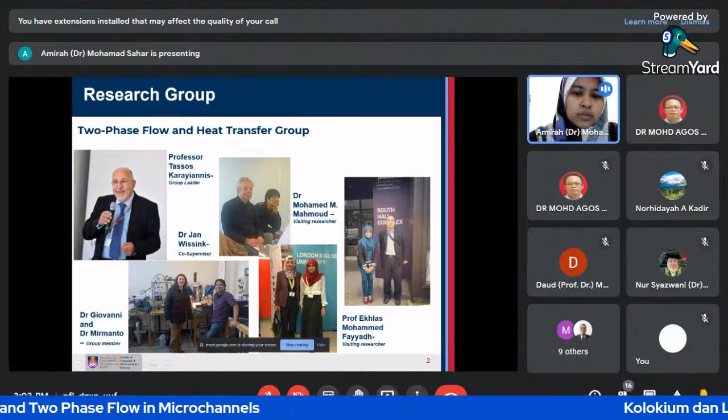Also working with two visiting researchers, which is Dr. Mahmoud from Zagazig University, Egypt, and Professor Ekhlas Mohammed at the University of Technology, Baghdad, Iraq. And also this is a group member and also the PhD student under this research group, which is Dr. Giovanni and also Dr. Mirmanto.

So Dr. Mirmanto is the one doing the experimental study, but in this group I am the only one to do the numerical work, which is the simulation work.

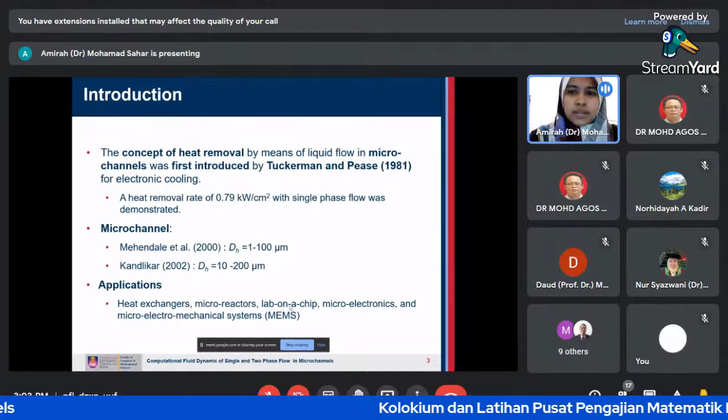Okay, so here is some research background about my study. The concept of heat removal by liquid flow in microchannels was introduced by these two guys, Tuckerman and Pease, in the early 80s for electronic cooling, which demonstrated heat removal rates of 0.79 kilowatt per centimeter squared by using single phase flow.

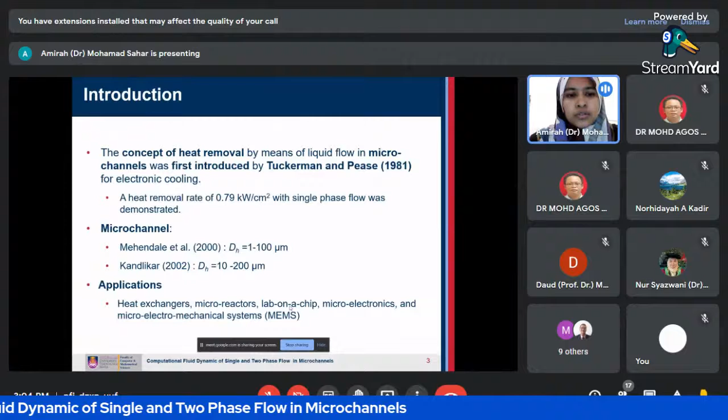Basically in microchannels, they characterize the microchannels by the diameter of the channels, which we call the hydraulic diameter. Most studies characterize based on the application, where Mehendale's range is between 1 to 100 micrometers, and Kandlikar's is between 10 to 200 micrometers.

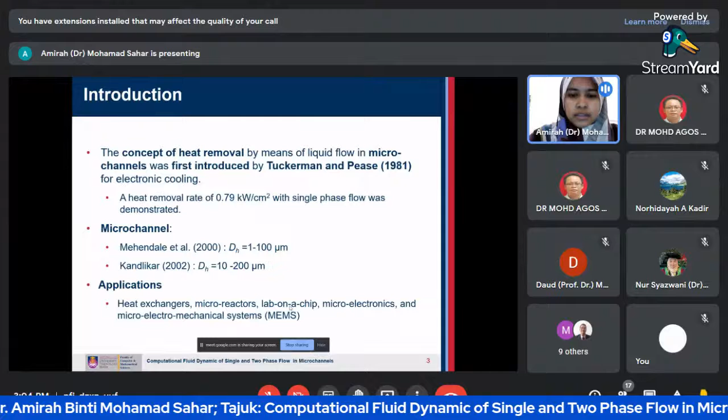So in microchannels, the application is mostly for heat exchangers and microreactors, lab on chip, microelectronics, and also microelectromechanical systems.

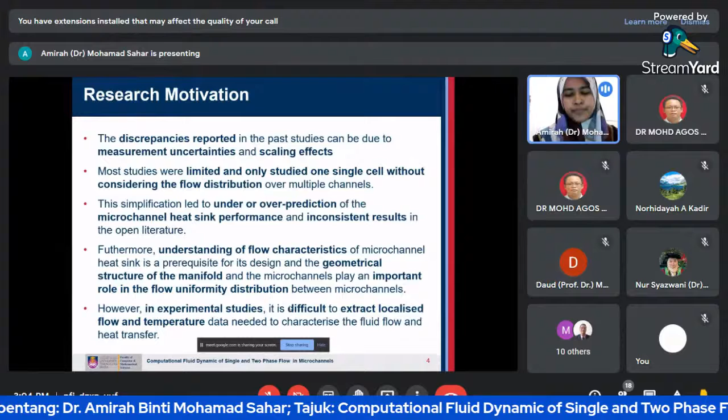The motivation of this study is that we found discrepancies reported in previous studies. Basically it's due to measurement uncertainties and also scaling effects, because most studies nowadays are still using conventional theory, which is macro-scale theory, applied to the microchannel system.

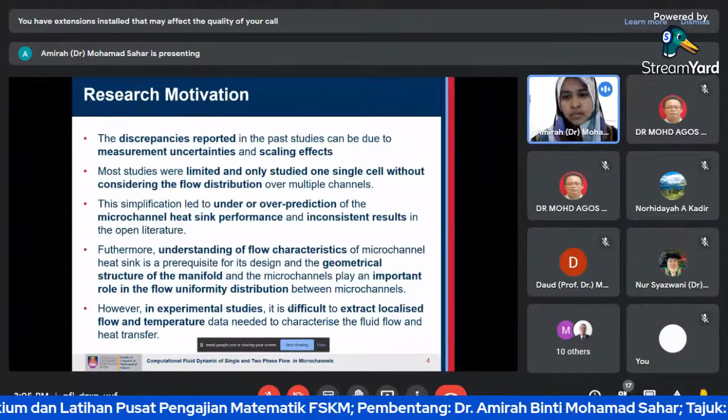And in a multi-channel configuration, there are limitations where studies only focus on single cells without considering the flow distribution. So we found this leads to under- or over-predictions of the microchannel heat sink performance, and also inconsistent results in the open literature.

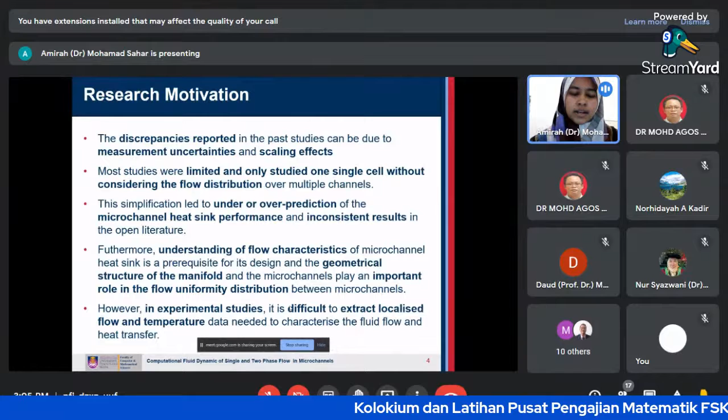So we know that understanding the flow characteristics is quite important. Basically this has significant influence on the geometrical structures of the manifolds, which plays an important role in the flow uniformity distribution. However, in experimental studies, there are limitations to extract localized flow and temperature data, which is very important to characterize the fluid flow and heat transfer.

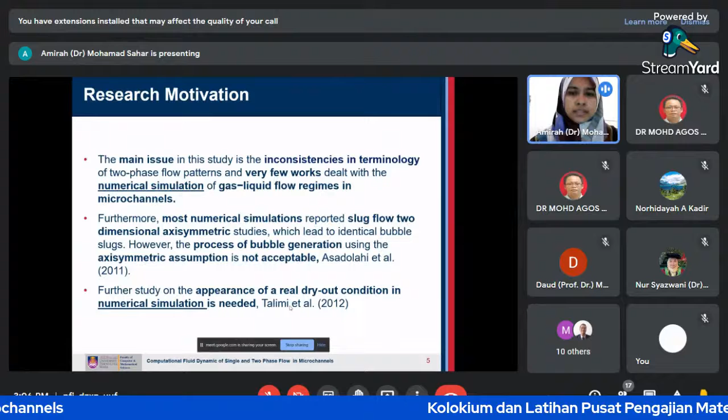For the two-phase flow issues, we found inconsistencies in the terminology of flow patterns in two-phase flow, and there are still limited works dealing numerically with the gas and liquid flow regime in microchannels.

Also, for specific flow patterns such as slug flow, most numerical studies conducted previously only use the assumption of a two-dimensional axisymmetric study, because they want to reduce computational time, but this leads to identical bubble slugs.

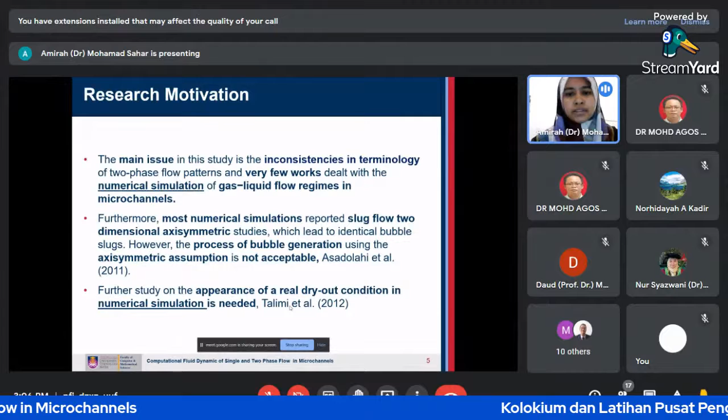Okay, so the shape of the bubble will be the same. However, we know that the process of bubble generation using the axisymmetric assumption is not acceptable. And also, the appearance of the real dry out in a microchannel system in numerical simulation is still needed.

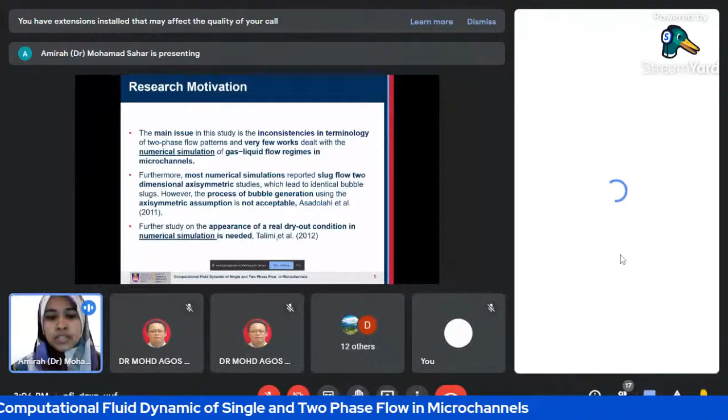So here is the objective of my PhD study, which has about six parts. I have to do single phase flow and also two-phase flow. In single phase flow, I have to simulate the single channel configuration or also the multi-channel configuration.

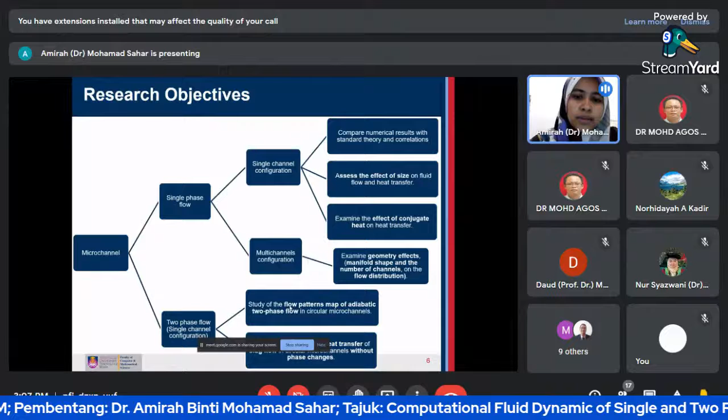In the single channel configurations, I focus on comparing the numerical results with the standard theory and correlations, and also assessing the effect of size on fluid flow and heat transfer, and examining the effect of conjugate heat transfer in a microchannel system.

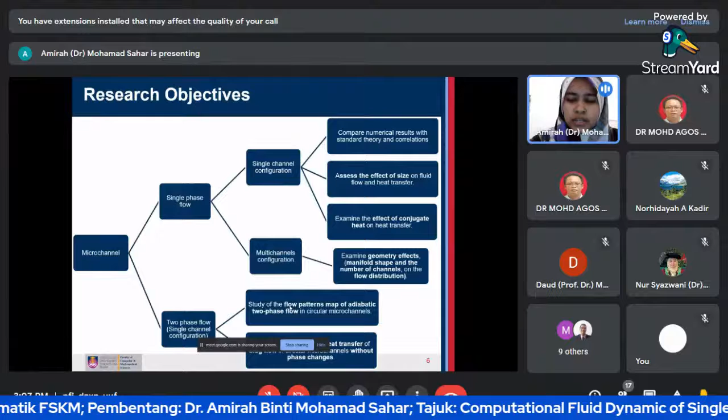However, for the multichannel configuration, we focus on studying the flow distributions, examining geometrical effects such as the manifold shapes, the number of channels, and the inlet flow arrangement.

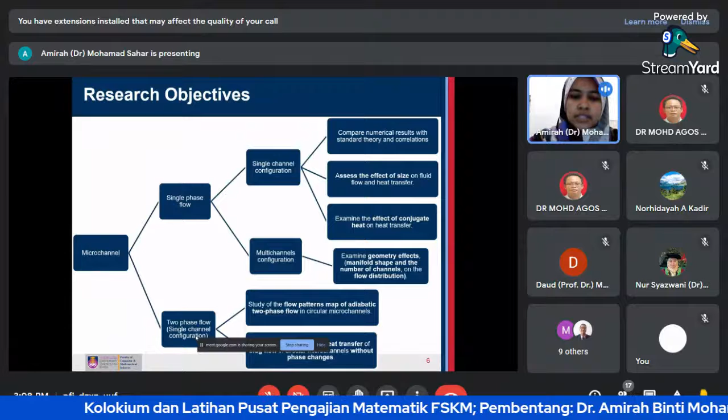In two-phase flow, which is the third project, there are two objectives: to study the flow pattern map of adiabatic two-phase flow in circular microchannels, and to study the fluid flow and heat transfer of the slug in a circular microchannel without phase change.

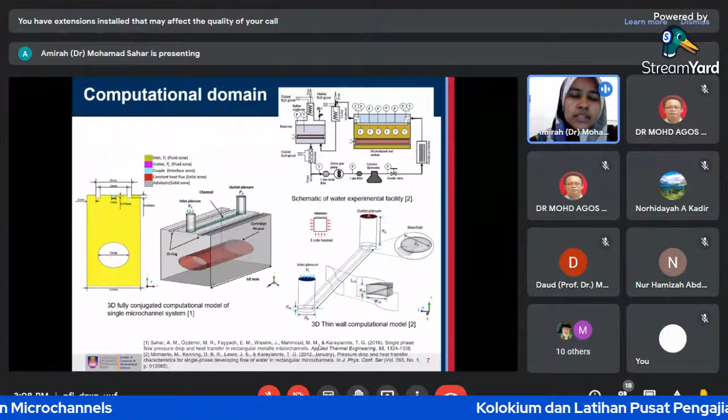I'm doing the full simulation using ANSYS Fluent to simulate all the numerical work, and I also construct the geometry and meshing using ANSYS ICEM.

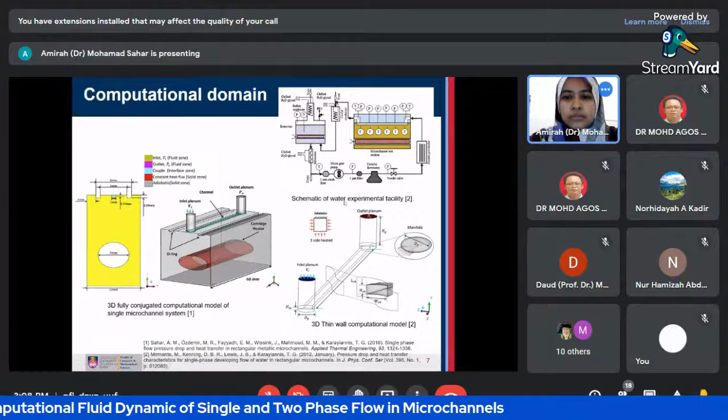Okay, so here is the computational domain. As you can see, here is a schematic of the water experimental facilities. This is the microchannel test section that I have to simulate.

In order to assess the size effect, I only use the 3D thin wall computational domain, because we want to reduce the computational time.

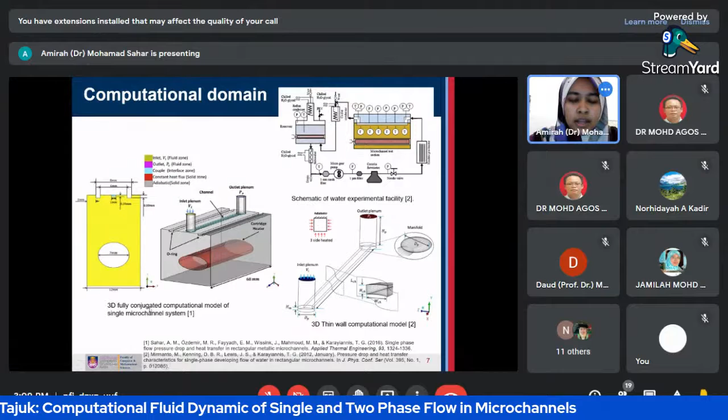However, in order to study the conjugate effect, I have to simulate the whole test section, which includes the copper block. So here are the channels on top of it, and here is the copper block, which you can also see from here.

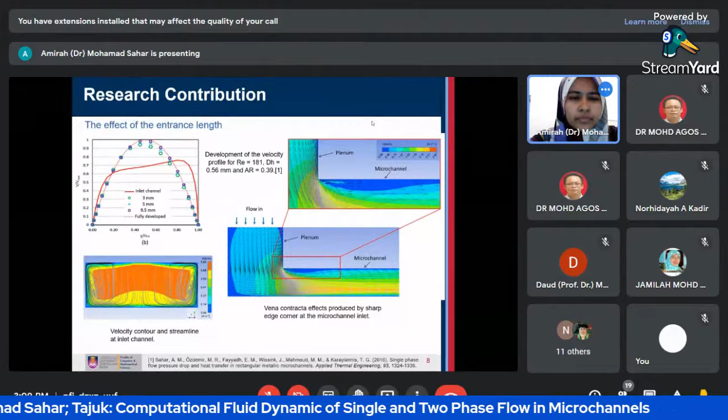Okay, so as a result, here is some of the research contribution. We managed to see the effect of the entrance length, because most experimental data reduction methods assume that the velocity profile entering at the inlet of the channel is fully developed.

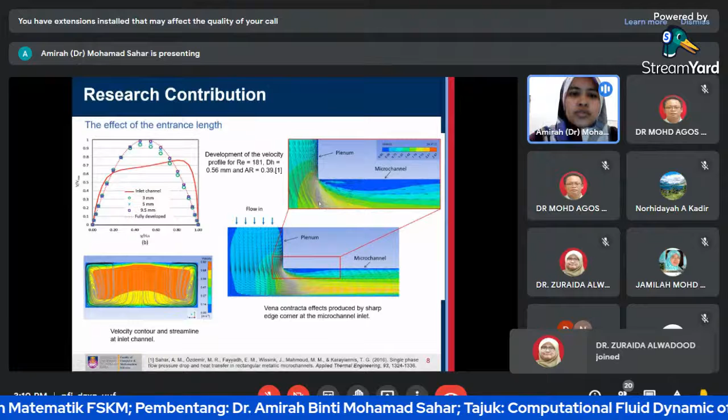They just assume that the velocity profile enters at the inlet of the channel, which is the plenum, and here is the channel. So they assume that the velocity profile is uniformly distributed, assuming it is fully developed.

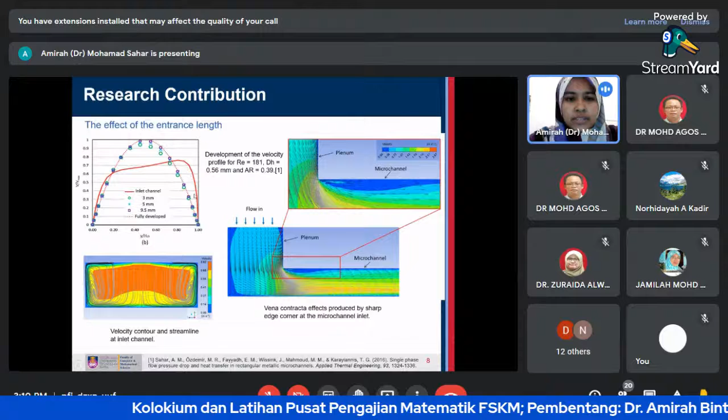However, the advantage of using CFD is that we can plot and get the velocity profile at a certain location we want. For example, we can see that the velocity profile at the inlet of the channel is not fully developed compared to other locations along the channel.

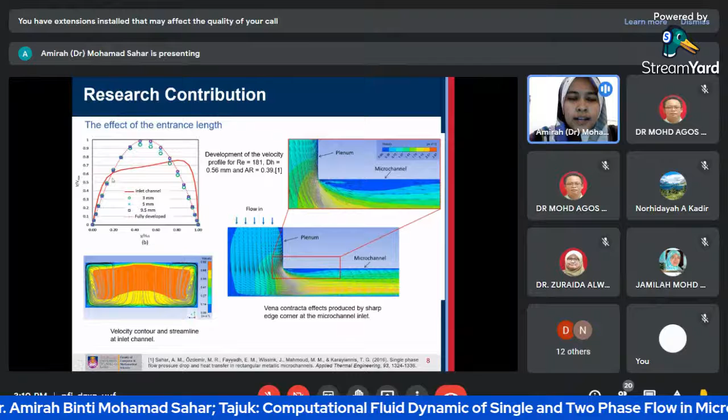This is because we can also show graphically using ANSYS CFD that this velocity profile happens due to the vena contracta phenomenon at the inlet of the channel, which is produced by the sharp edge corner exactly at the inlet of the section.

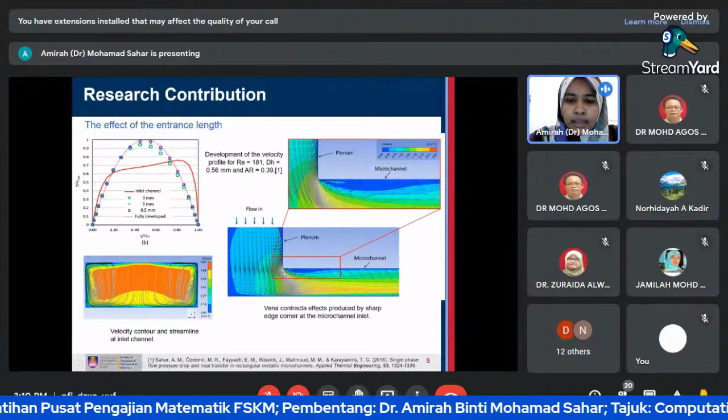All right, so here you can see the velocity contour and streamline at the inlet of this channel. This result was successfully published in Applied Thermal Engineering.

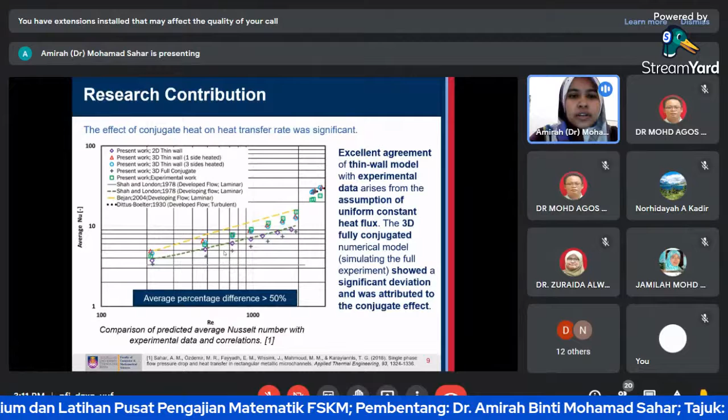So the second objective, another part of the first project, is that we also managed to show that the effect of conjugate heat transfer in a microchannel system is significant.

In my study, for this case I developed four models, including a 2D thin wall model, which I needed to conduct in order to compare with the conventional theory, because in conventional theory they just use a two-dimensional model.

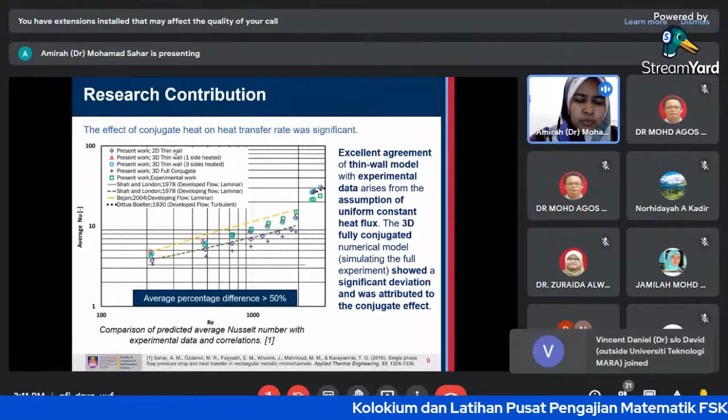And also I did a 3D thin wall model.

The assumption that you use in experimental is exactly the same that we did in the simulation, which is in terms of the boundary condition.

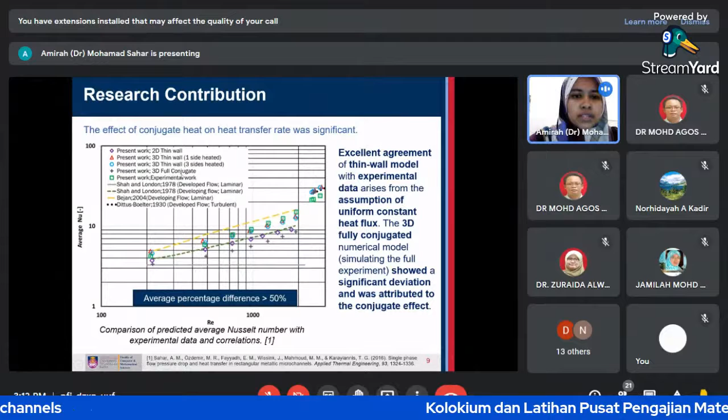So in order to study the effect of the conjugate, what I have to do is a 3D full conjugate simulation, which is you have to simulate the whole test section with a copper block.

So what we found is that for the 3-dimensional case, which is exactly the experimental setup, we are not in agreement with the experimental data provided by the group in my research.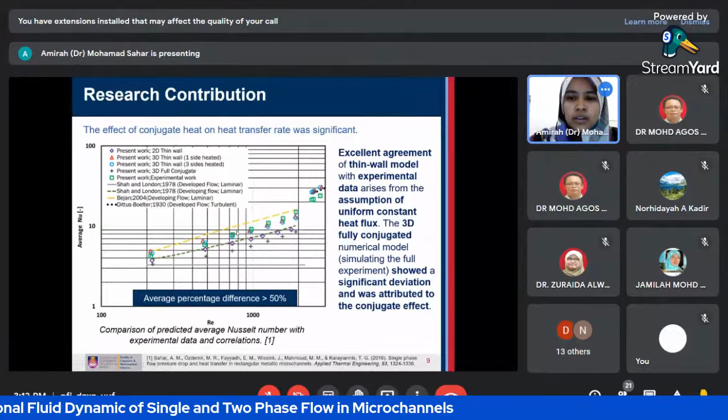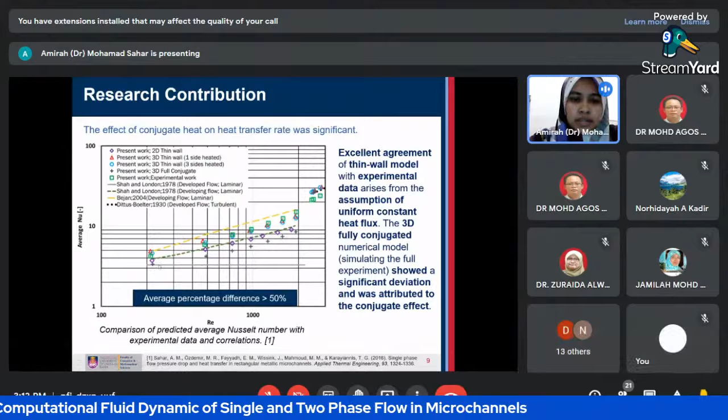Because the assumption is exactly the same as used in the experiment, we get a similar result. However, we can see the effect of the conjugate was significant: the percentage difference using the 3D full conjugate is more than 50%, which does not agree with the experimental data, nor with the 3D thin wall model.

So this is because we found that in the experiment they assume the heat flux is uniformly distributed along the channel.

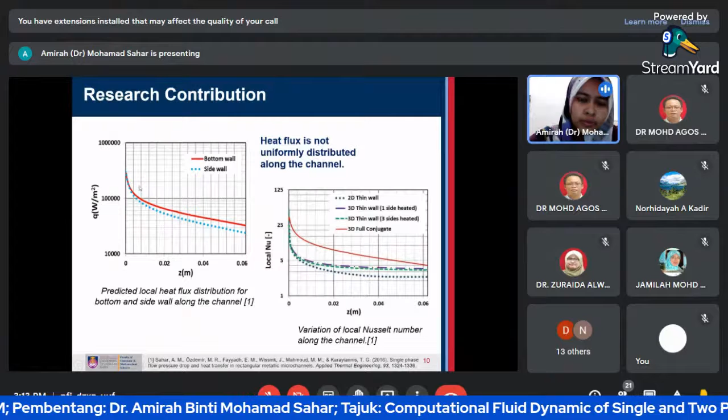However, we managed to show that they have a conjugate effect in a microchannel system, which is we can see there is a reduction of heat flux along the channel.

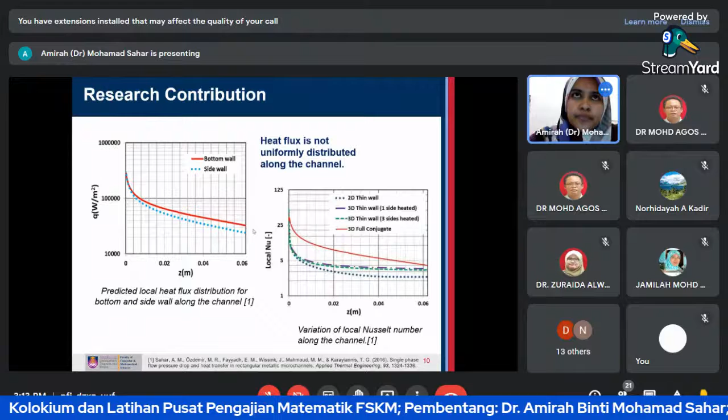That's why we get a lower Nusselt number compared to the predicted value from my simulation in a 3D thin wall model without considering the conjugate effect, and also compared to the real experimental data.

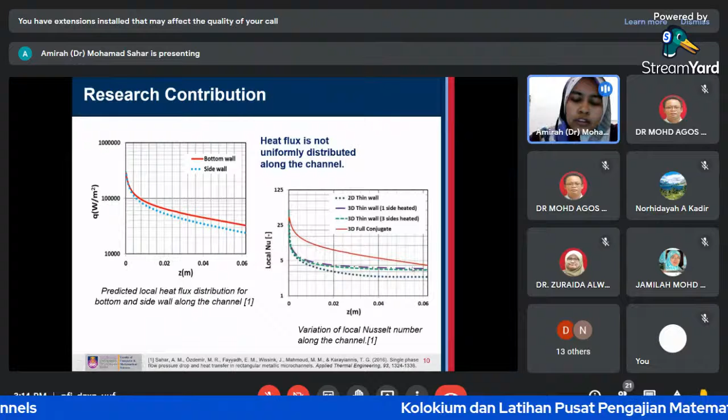So you can see also in the 3D case that the heat flux is uniformly distributed. However, if we consider the conjugate effect, which is simulating the whole test section, we can say that the heat flux is not uniformly distributed.

This result is also published in the same paper.

Other than that, I have some results for the objective of assessing the size effect. In the size effect, I just show the effect of the aspect ratio.

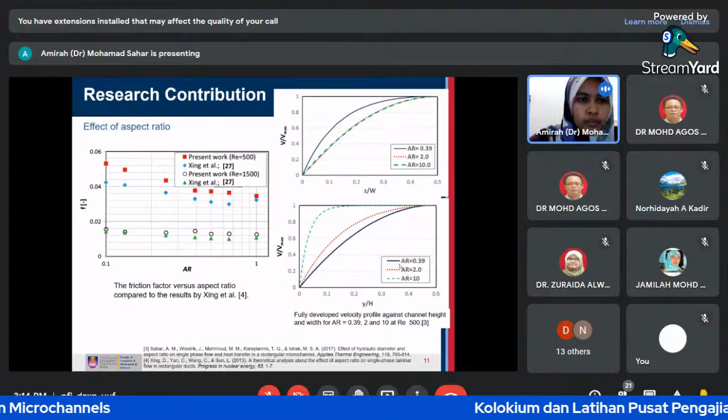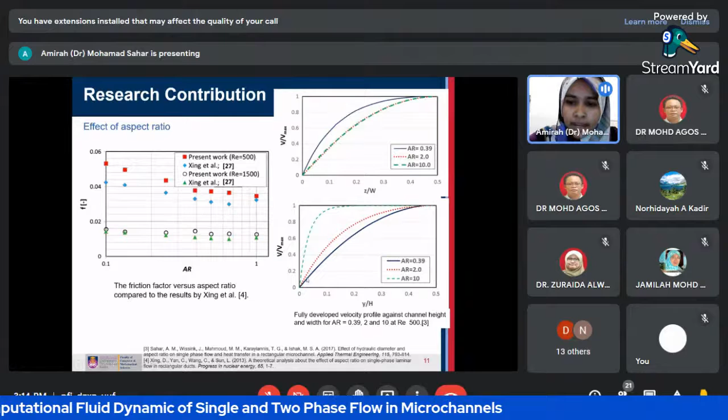Based on the friction factor against the aspect ratio, we can say that it's decreasing when the aspect ratio is increasing. This happens because the velocity profile at the different or various sizes of the channel has a significant influence as well.

That's why we can see a significant effect of the aspect ratio in this microchannel heatsink system.

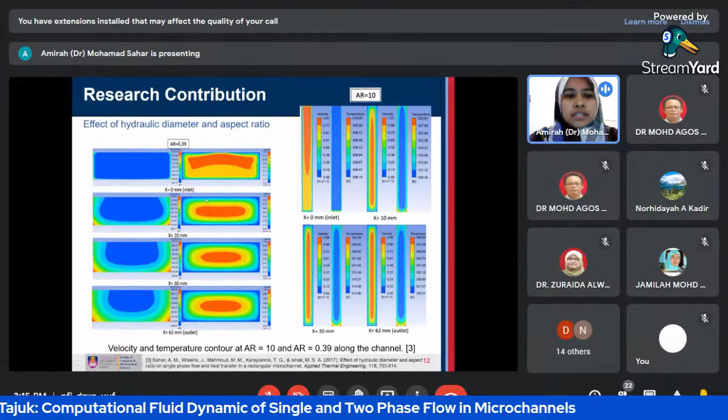We also, with the advantages of this CFD, can provide graphical plots, which show the velocity profile and the temperature profile.

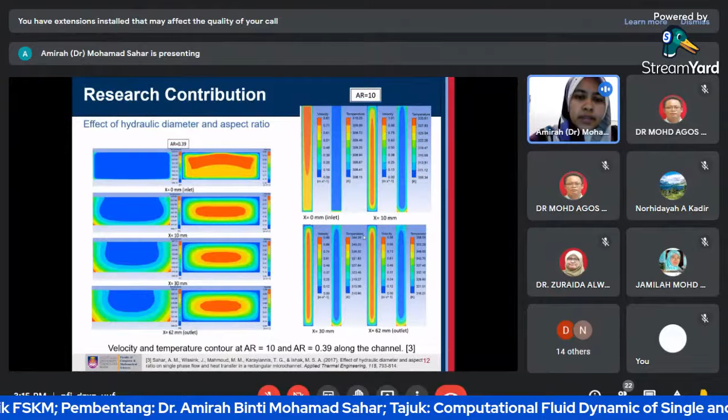You can see a slight difference between the lower aspect ratio and the higher aspect ratio here. That's why we get different fluid flow and also different temperature behavior when we vary the size of the channel.

So here is the computational domain for my second project, which deals with multiple configurations. Here is the detail of the test section used in the experiment, because in the previous study we know that the effect of the conjugate is significant.

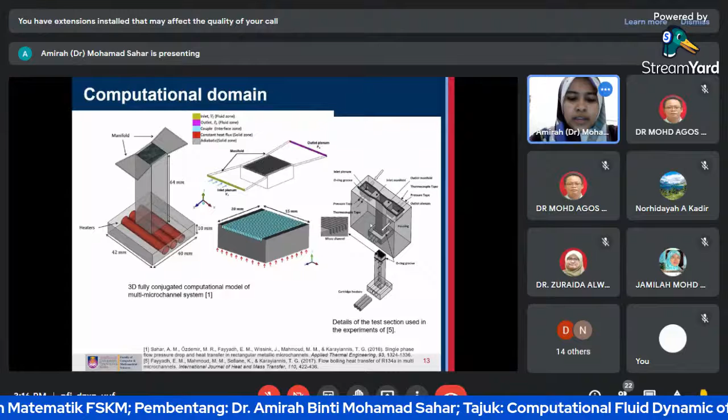So that's why we have to simulate the whole test section here, considering the copper block. And also, we know the importance of the structure of the manifold, so we include it in our computational domain.

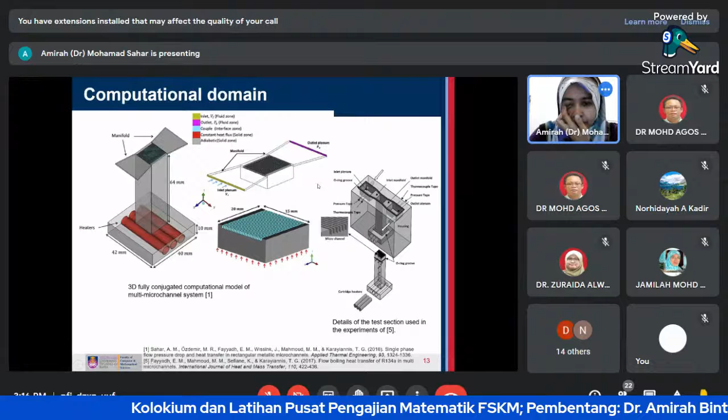One of the contributions is that in this study I studied the flow distribution for different shapes of the manifold, different numbers of channels, and also different inlet configurations, but I'm not showing that here.

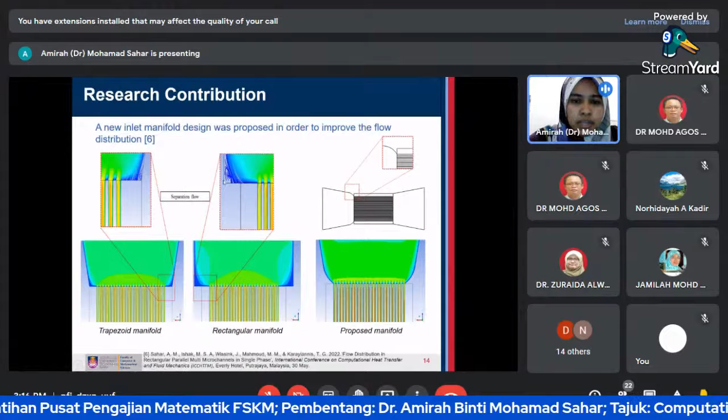The last thing we found is that there is a significant influence of flow separation, which occurs at the sharp edges of the manifold.

In order to reduce this occurrence, which we believe affects the non-uniform distribution among the channels, we try to reduce the sharp edges here.

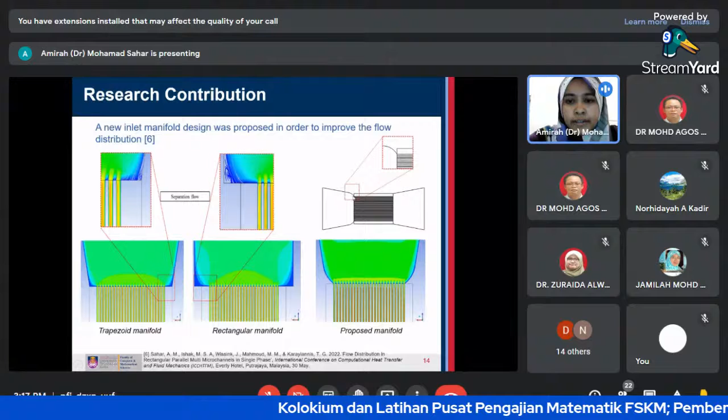In order to determine whether we get a better uniformity of the flow distribution inside the microchannel, we calculate the maldistribution factor.

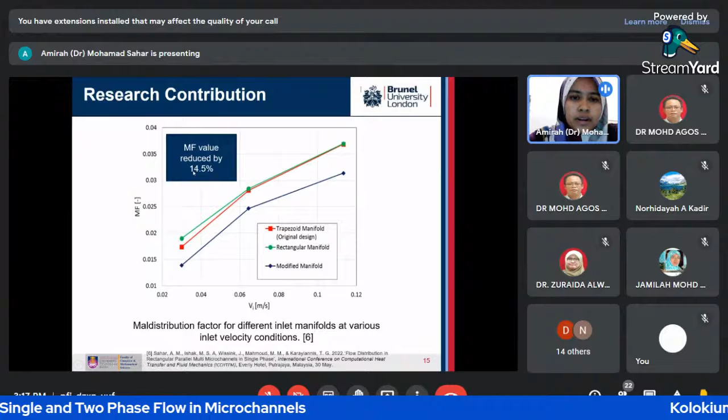The maldistribution factor reduced by almost 15%, which is the lesser value, meaning the flow distribution is better compared to the other design. I compared a trapezoid manifold and a rectangular manifold in this study.

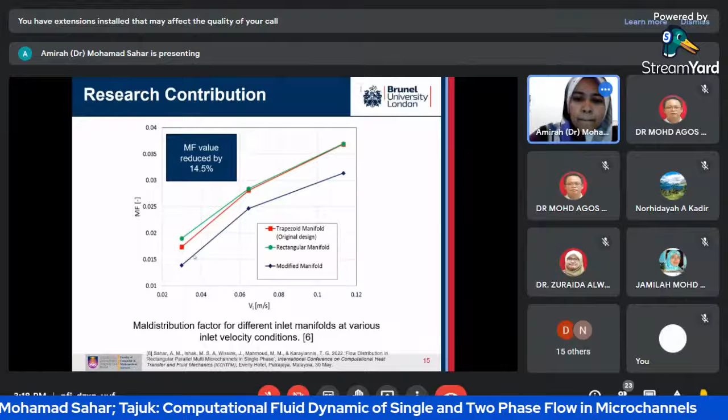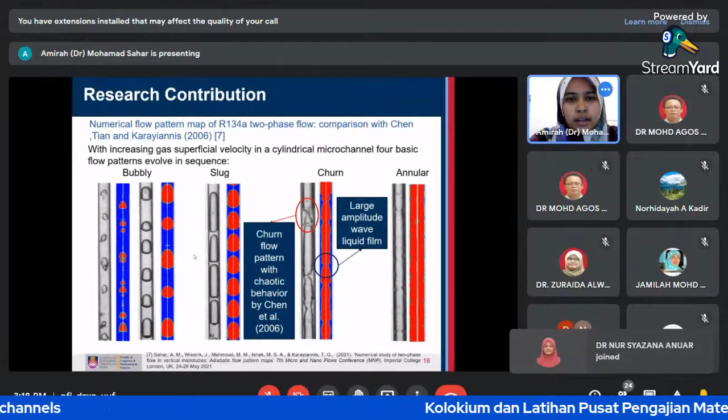All right, so the last project, the third project, is about two-phase flow. Here is a numerical flow pattern map of R134A, the refrigerant used in this system.

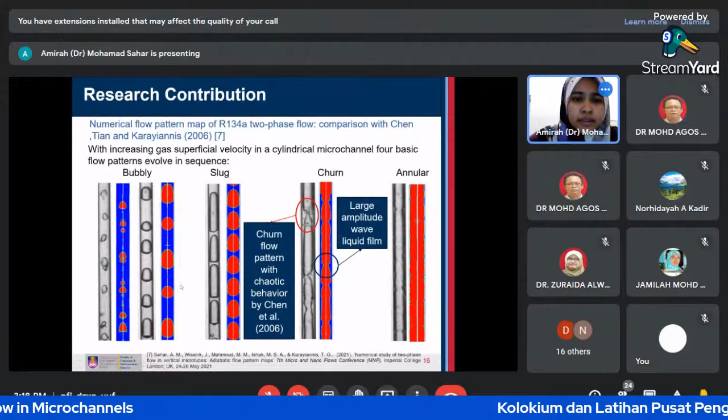Here the blue and red represent the numerical work, which we compare with the data provided from a previous study, the Chen, Tian, and Karayiannis flow pattern. Based on this comparison, we found agreement with the provided flow pattern.

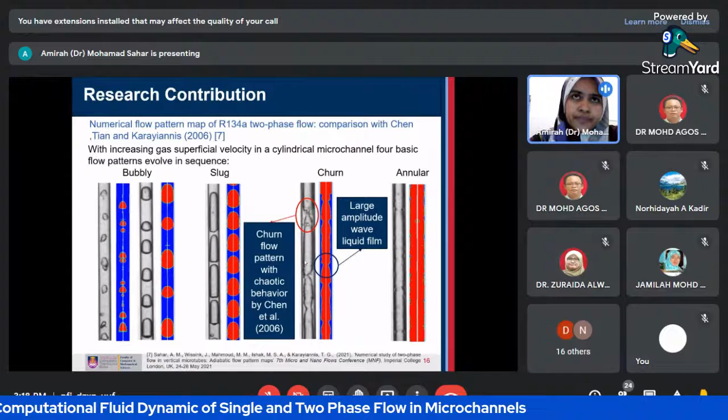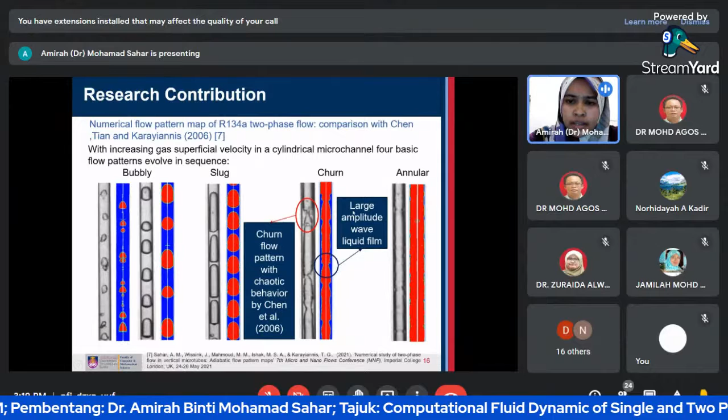However, due to limitations of the model, I used a two-dimensional axisymmetric domain to reduce computational time. The chaotic behavior Chen described was not observed in our numerical work, because we only observe the large amplitude wave liquid film.

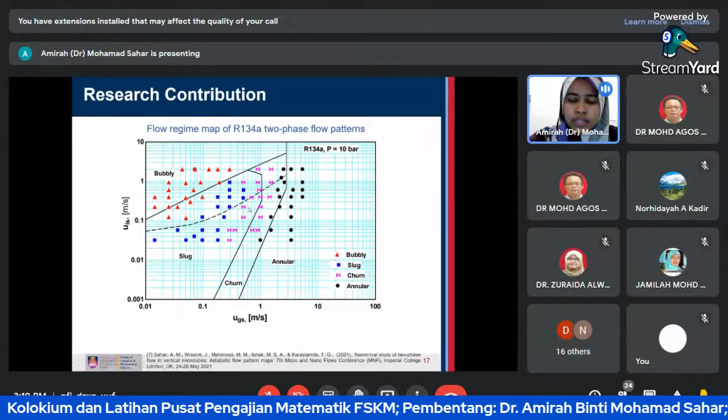However, this result is still in agreement. We also compared the correlation they provided. I plotted all the flow patterns based on the information shown before, and it almost agrees with the correlation.

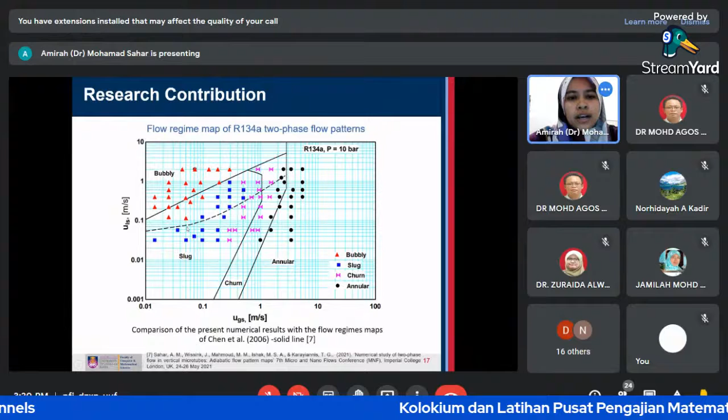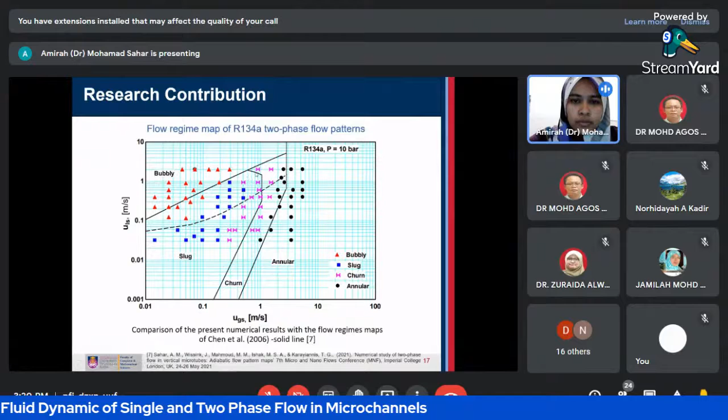There are some bubble flow and slug flow patterns, but this is still acceptable because in the previous study there was a lot of overlap in terminology between bubble flow and slug flow. We also see that the churn flow is observed earlier compared to the provided correlation.

The last objective of this project is a three-dimensional simulation specifically for the slug flow pattern. Most studies are conducted only in two dimensions, which leads to a similar shape of the bubble flow. Let me show what I mean by similar shape.

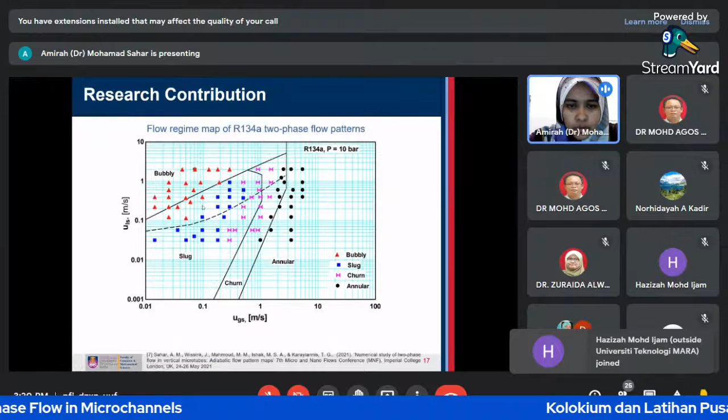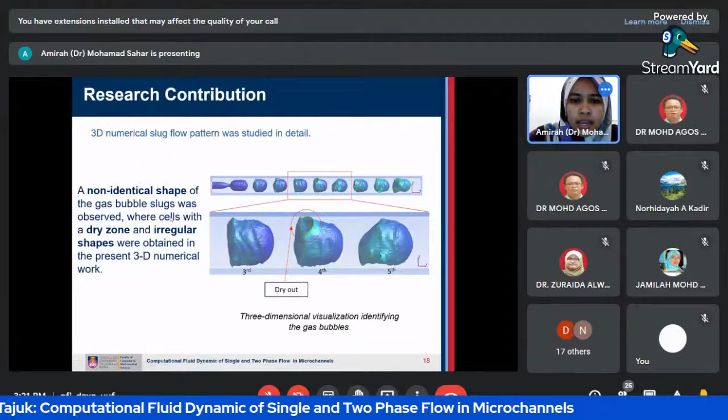If you do the simulation in a two-dimensional axisymmetric domain, you only get a similar shape of the bubble. However, if we conduct a three-dimensional simulation, we can see the bubble shape along the channel is not identical.

As you can see here, we have the dry zone bubble shape, and also the irregular shape of a bubble slug. And here is what I'd call the bullet shape, which is the perfect shape for slug flow.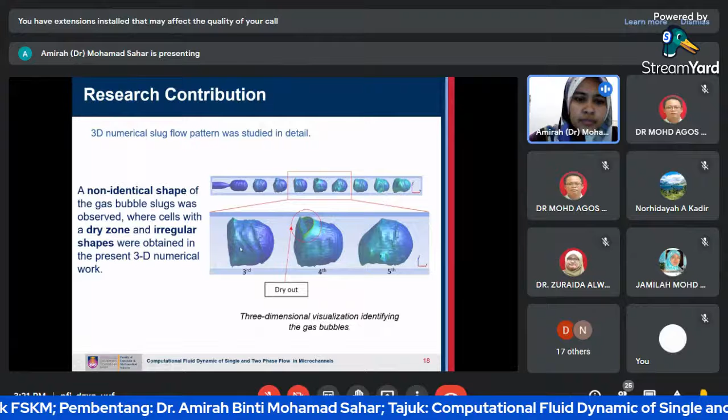The meaning behind doing this study is because we know that different shapes of the bubble will have different velocity profiles and temperature profiles.

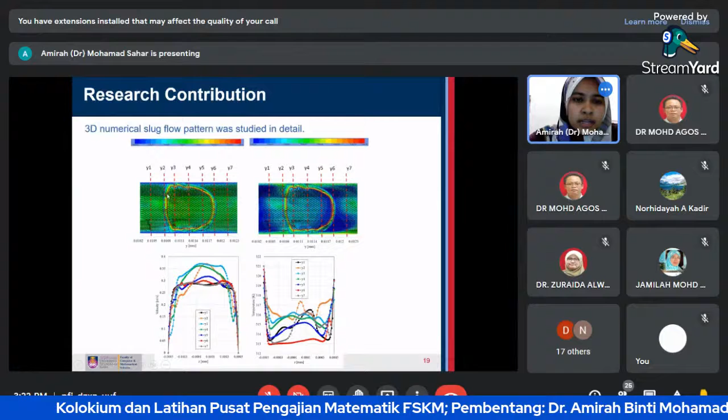Here is an example where we studied in detail the velocity profile occurring exactly at the location of the bubble, this is the tail and this is the front of the shape. We plotted the velocity profile and the temperature profile at the exact location we wanted.

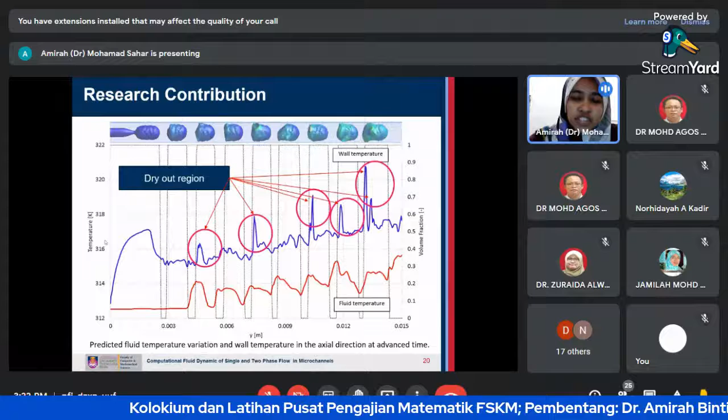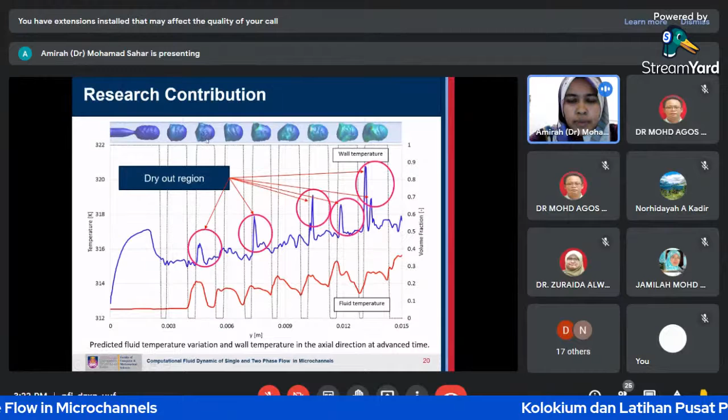We believe, as you can see here, that different shapes of the bubble lead to different behavior in temperature and velocity profiles. The bubble with the dry-out region has a higher wall temperature profile; these five bubbles having dry-out show the peak wall temperature. Here is the fluid temperature.

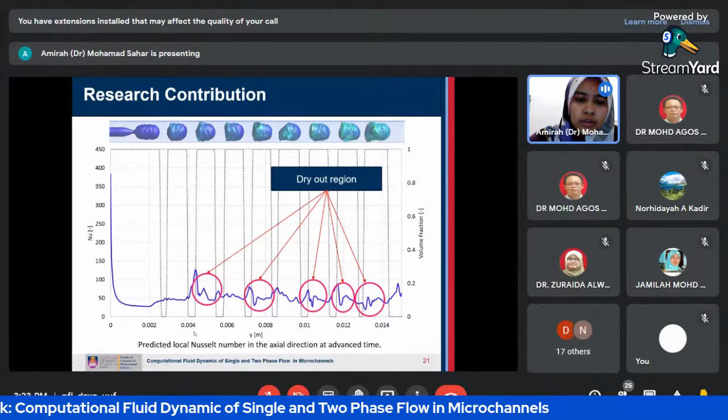In terms of studying heat transfer rate, we calculate the Nusselt number. For the dry-out region, we know it leads to lower heat transfer. That's why conducting this 3D study is very important, because we have to study in detail the behavior of the fluid flow and heat transfer.

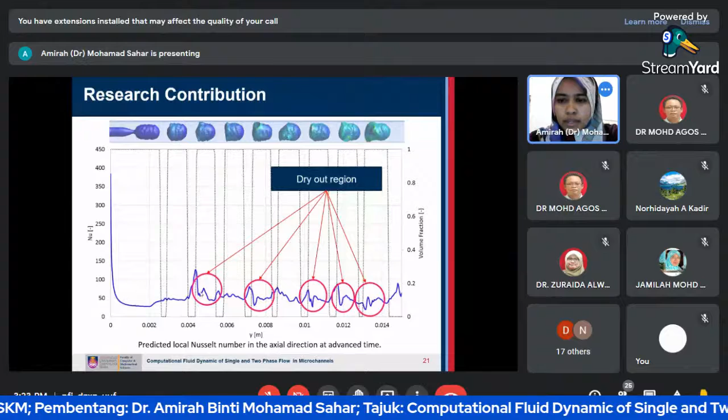The main research contribution is that the 3D full conjugate simulation can help determine how much error is due to the assumption of a uniform heat flux.

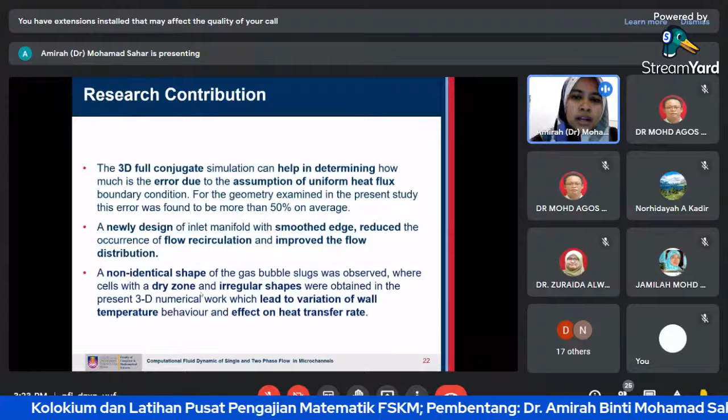Also, in order to reduce flow recirculation and improve flow distribution, we propose a newly designed inlet manifold with smooth edges.

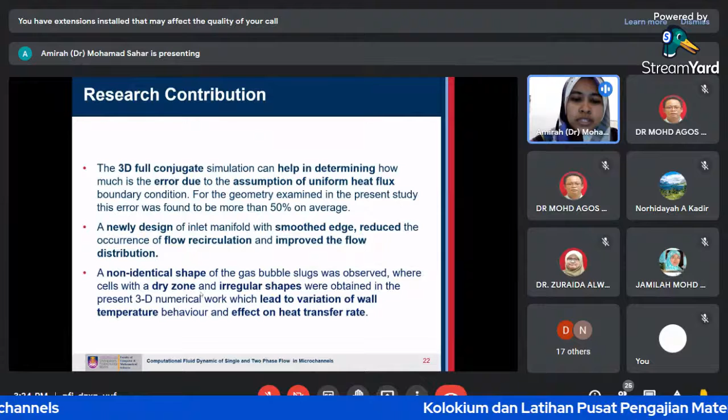Also, a non-identical shape of the gas bubbles was observed in the 3-dimensional study, and this led to variation in the wall temperature behavior and affected the heat transfer rate.

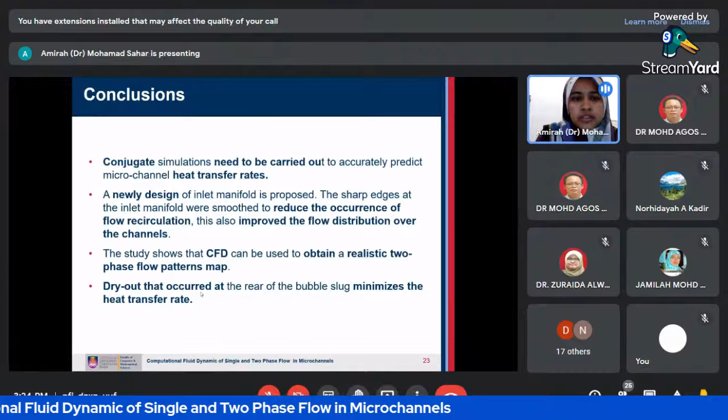As a conclusion, conjugate simulation needs to be carried out to accurately predict the microchannel heat transfer rate, and a new design is proposed to reduce flow recirculation in the inlet manifold and improve flow distribution over the channels.

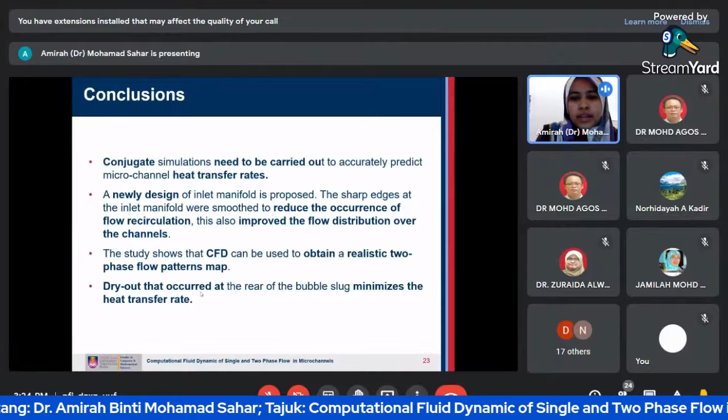The study shows that CFD can be used to obtain realistic two-phase flow pattern maps, and the dry-out that occurs at the rear or tail of the bubble slug minimizes the heat transfer rate due to high wall temperature.

Here are some articles, publications, and conferences that I have joined. Okay, thank you.

Assalamualaikum, Doktor. Very impressive research. What I can say is Dr. Amirah covered many objectives, and all the objectives were achieved, right? Alhamdulillah. Thank you.

Doctor, may I know all the attractive, colorful findings - are all the results obtained from CFD Fluent software? Yes, all the results we extract from ANSYS Fluent.

ANSYS Fluent, yes, we can extract all the results from that solution. And may I know about the equations that you apply to generate the results?

There's no other equation that I input into ANSYS Fluent. But in ANSYS Fluent, if you have some added equations to solve your work, you can use UDF, which you put inside ANSYS Fluent, giving the information inside.

But I don't have experience with that yet, because of my workload. So it means I do not play with the equations - no, I didn't insert any equation there, I just use the equations provided in the software.